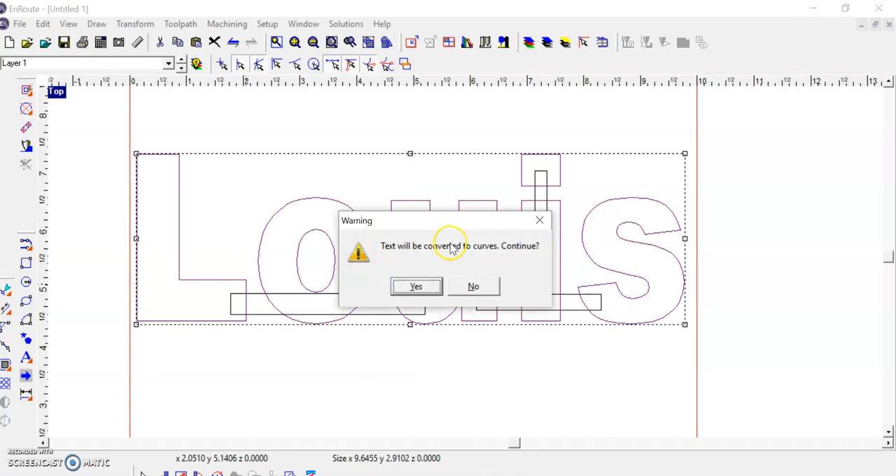The next step is going to be to make these letters into actual lines that we can work with. And the best way to do that I found is to right click it, go to create toolpath, go to Kerf compensation, click that. It'll say text will be converted to curves, continue. You want to click yes. And after that you can just click cancel. And now we have some lines that we can work with.

And down at the bottom, you want to click ungroup or Control U to separate all of these. And now we're going to go through and actually weld them together. So I'm going to click the L, Shift, and then click that. Down at the bottom, there is the Weld Joint tool. Click on that, it makes it into one shape, and we're just going to go around and keep doing that. Alright, so now I have the actual shape that is going to be cut out.

Now we're going to create the toolpath for it. So by doing that, right click, it'll say create toolpath, Kerf compensation, click that, and in here there are a lot of different things that you can change to change the way that it cuts. And because this is the outside cut, this is going to be an external path, so it's going to be male. You want to keep the weld offset on. The direction type doesn't really matter.

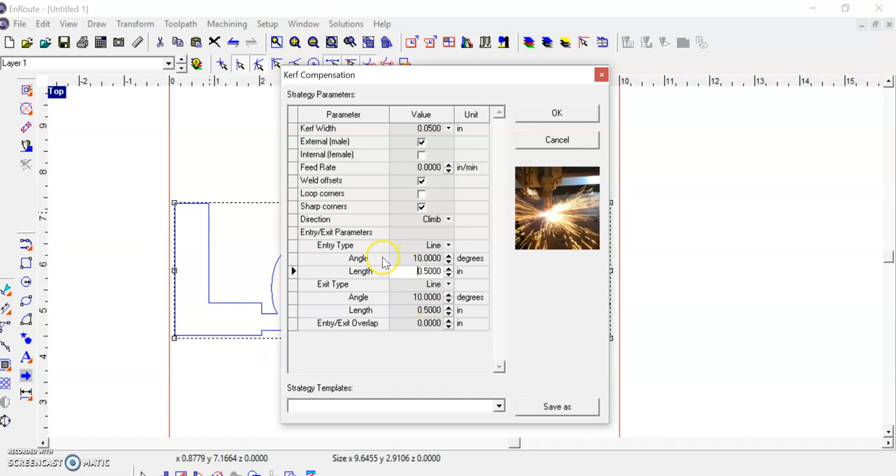And the entry and exit type. These are very important. They make sure that when the cutter starts out, it doesn't actually start on the line and leave a big hole. So what I'm going to do is just try the line at first, and we'll see where it comes up, and then I can make changes from there.

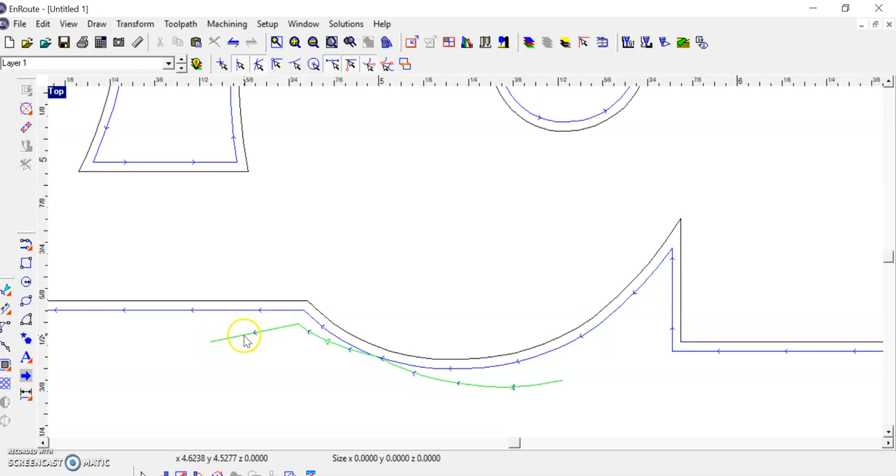So once you have everything selected, click OK, and I can see right down here my entry type is the line, but it makes a curve because it's following the letter. So my torch is going to start right here, actually cut, and then it's going to follow in through the letter. Same thing, then it's going to go all the way around, and then it's going to come out right here and stop right there. So it makes a nice clean entry and exit. Same goes for over here.

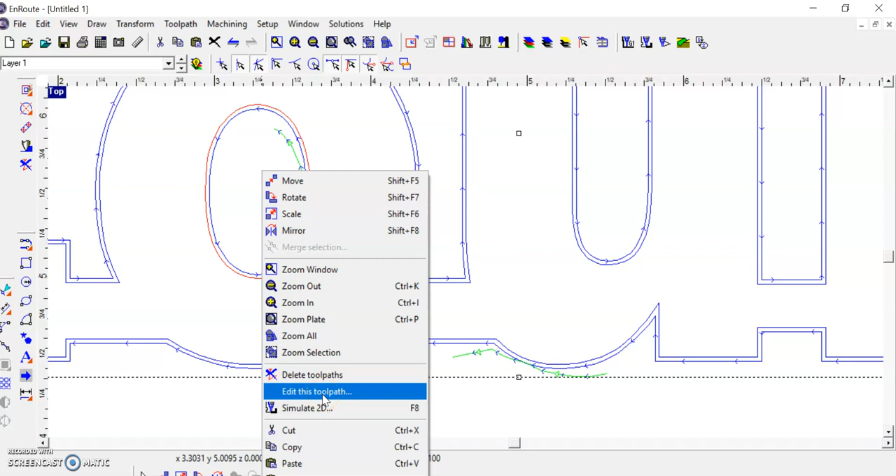I did get lucky where it auto created this for me, but in a different circumstance, you would go to this, right click, and then it would pop up with create toolpath. In this case, I'm going to click edit this toolpath. This is actually going to be an internal cut, so a female cut. The lines and the entry and exit path were actually good, so we don't need to edit that.

But in some cases, this green arrow overlaps with your actual piece, and if it does that, it's going to cut into your piece, and you don't want that. So just play around with the angle, the entry and exit type, until you get a green arrow that is going into stock that you're not going to keep, to make sure that it all works out.

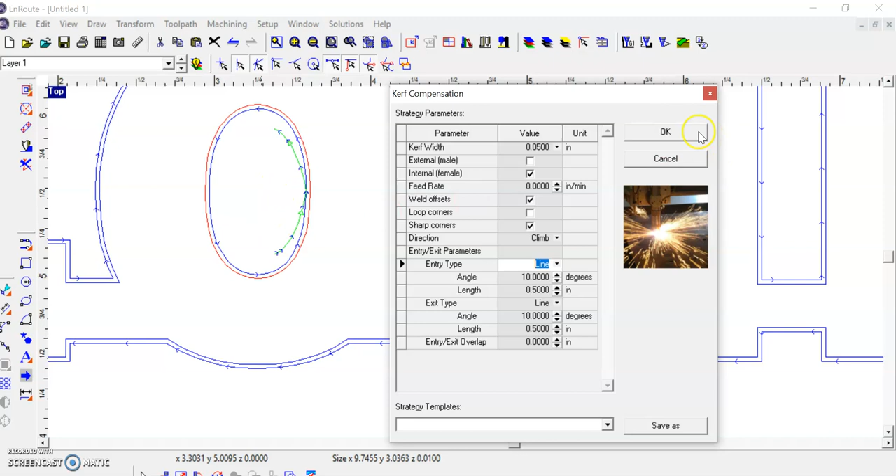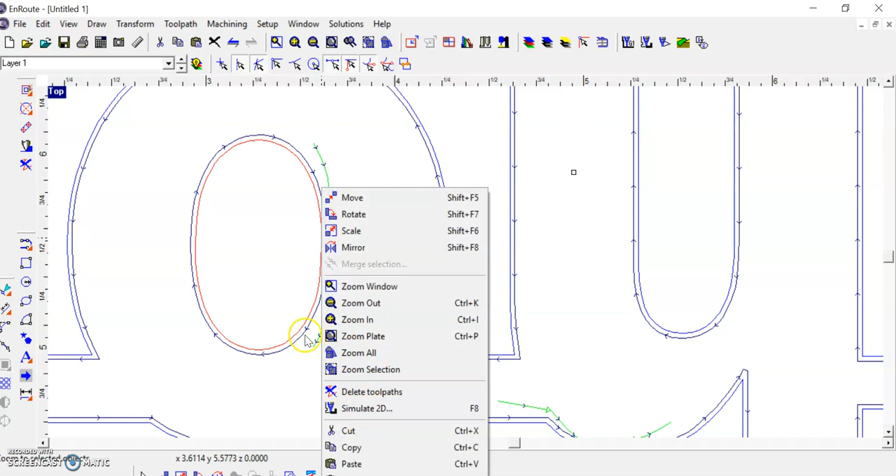In that case, switching that isn't what I want, so here's an example of what you do not want. This is in the center of my O, so it's going to start here, cut all this, and completely ruin my piece. So I'm going to right-click that again. It'll let me edit the toolpath, change it back to a male, just because when I created this, it selected all of that and it made those changes for me. Click OK again, and now it's back to what I want.

And anytime you have an internal cut, it's going to show up as red. Any external cut is going to show up as blue. And one of the last steps to do is to edit the toolpath order, because if I were to cut out the shape of Louis and then the O, it won't be stable and you might have it shift around or warp. So we want it to cut the inside of the O first.

So to do that, we go up to the top right hand corner and click Set Toolpath Order. And here you can show what order the toolpath is actually cutting in. And because of the way I set it up, it has it as just one toolpath, but it is good that we had it on the center one first and then over here.

The way to change this would just be to click the green arrow, which is going to cycle through each of your toolpaths. Actually, no, the green arrow is going to cycle between the order of toolpaths, and the blue arrow is going to go between the toolpaths. So in this case, everything worked out good with the order of the toolpath, so I can just click OK.